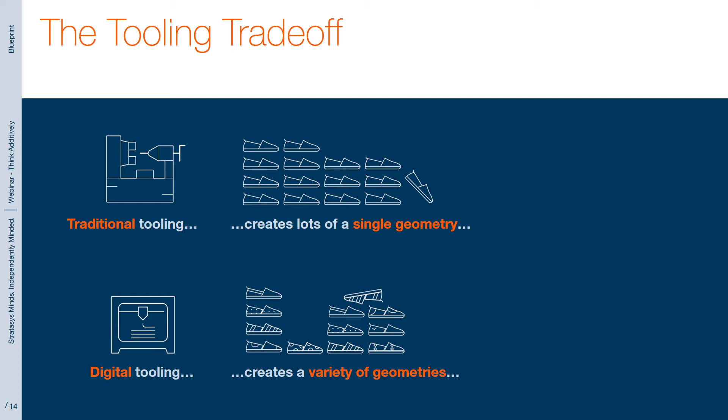Now, with traditional manufacturing naturally comes repeatability. With rigid tooling comes rigid processes and therefore rigid outcomes. Traditional tooling may require hand polishing, a little knob turning, or other adjustments to get what's needed, but once that process is down, it's pretty precise. Digital tooling is naturally more flexible, which generally reduces the accuracy and precision of the part.

For example, take injection molding. A moderate complexity injection mold takes months to design, manufacture, hand polish, and test, and then rework and hand polish again and test. But once it's running, it makes exactly the same part it was supposed to make. Every defect is rubbed away over the long weeks of hand polishing and fitting.

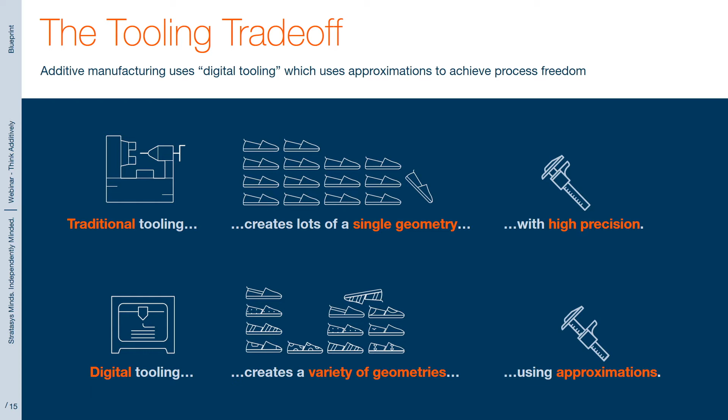Digital tooling is almost entirely created using automated softwares that turn CAD into parts. The user has to do very little to get digital tooling ready for action, but in exchange, they compromise by allowing the softwares to use geometric approximations to get a part very close to the complete design.

Okay, but enough theory. What actually are these digital approximations that are so critical to 3D printing and digital tooling? There are 3 that are shared by almost all 3D printing technologies, so we're going to explore them today and how to deal with them using good design practices. These inherent inaccuracies are mesh approximation, layer approximation, and toolpath approximation.

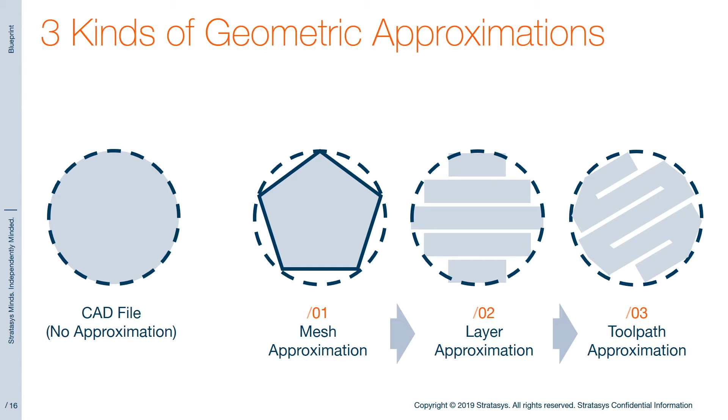So, for the first approximation, let's look at meshes. Now, I'm guessing most people are pretty familiar with mesh files. They've been around for a long time and are used in all kinds of digital processes, from renderings to video games. Basically, a mesh is a geometric approximation of a complex shape. It takes complex geometric entities like curves, splines, radii, lofts, etc., and generates triangles or squares that approximate those complex math-driven equations. It's kind of like trading quality for quantity.

A shape may only be made up of a couple of complex surfaces, or it can be made up of thousands of simple surfaces in the form of a mesh, like you see in the part on the screen. So why is a mesh used over CAD surfaces? Well, like I mentioned, they're very simple. Just a bunch of triangles all touching 3 other triangles in space. And because they're simple, they're non-proprietary or universal, and they are flexible. Basically, since they're just triangles, they can be edited by very simple programs, even in a text editor like Notepad.

Finally, it's easy to store color data in meshes. A mesh file is like a rock climbing wall with lots of footholds to attach color data, whereas CAD files are kind of smooth and slippery, making it difficult to assign color and textures.

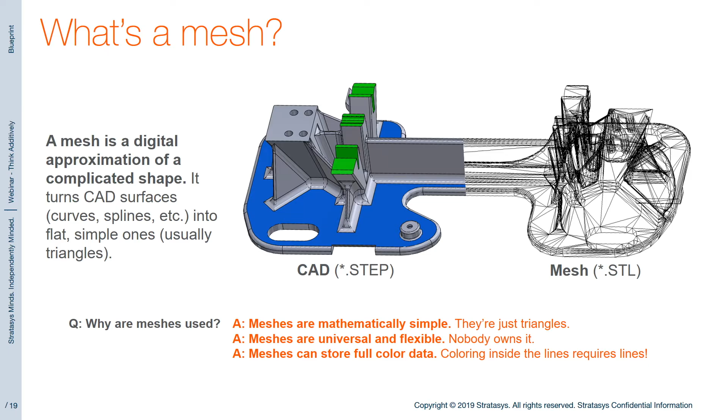Okay, so let's look at a mesh. This CAD model of a simple 3D printed duct is made up of a few complex curved surfaces, and I'll turn them into a triangular mesh. SOLIDWORKS files are often converted to mesh files before 3D printing, so it's easy to save as STL file in SOLIDWORKS. And you can see here that this is the mesh approximation of this CAD file.

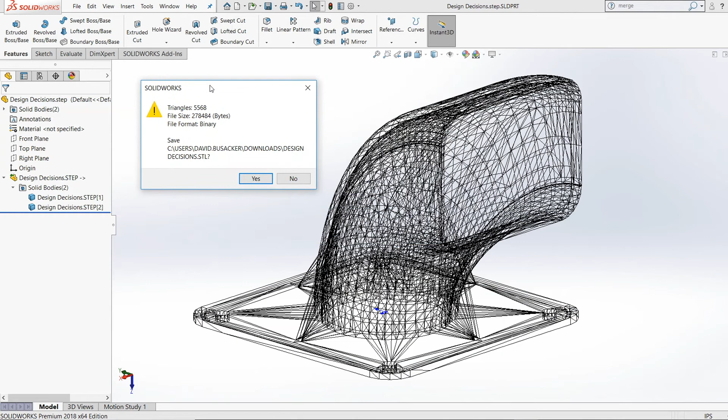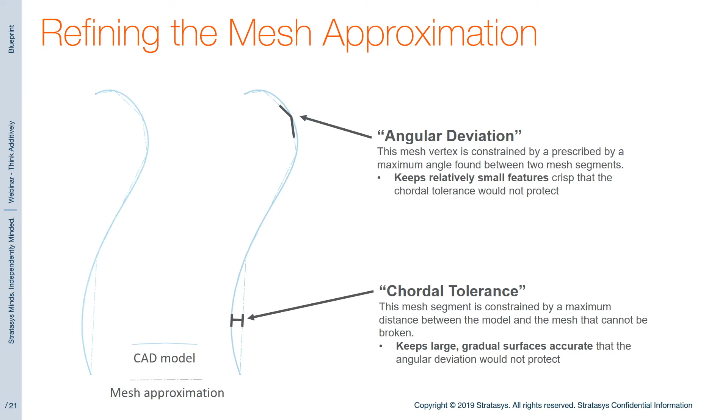Approximations can be a source of inaccuracy, but fortunately you have control over the degrees of the approximation. The math used to turn CAD files into meshes relies on 2 control factors: angular deviation and chordal tolerance. We are not going to go deep into the math on these ideas, but basically, reducing each of these variables is going to result in a tighter, more accurate mesh. But a more accurate mesh, like everything in life, comes with a trade-off.

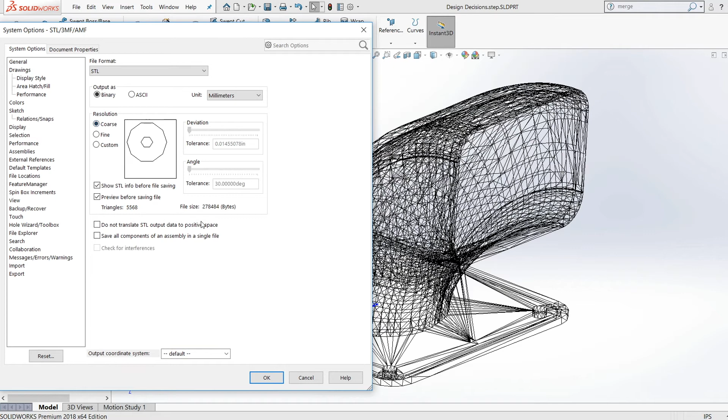To see that, we're going to go back to our duct model here, export to STL again. Now, if I click on Options, I have a little more control over how my mesh is created. There are a couple of mesh resolution presets here, coarse and fine. There are more triangles in the fine mesh, but it's a tighter approximation. You can also see, though, that the fine mesh is about twice the size in terms of data as the coarse mesh. And if I reduce both of these settings here, it gets to like 5 times the file size. So meshes get really big really quick.

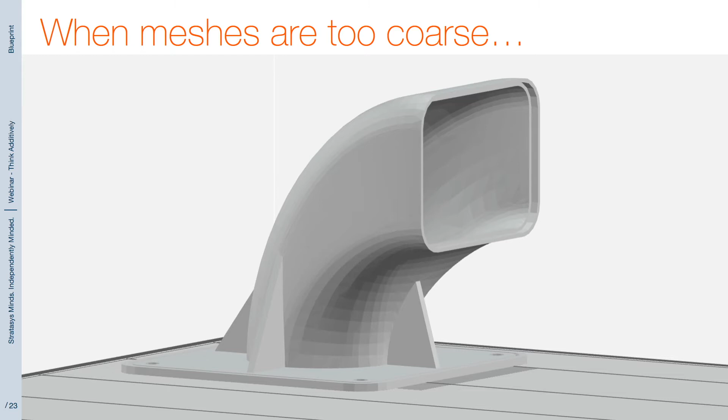Using a mesh that is too coarse is going to look like a geometric approximation. You better bet that the triangles in this coarse STL mesh here on the screen are going to show up in the final part. But on the other hand, large meshes can bog down your computer and add unnecessary processing time to design steps required before printing, like part cleanup, or orientation or support generation.

Okay, so here is a practical tactic to help with dealing with mesh approximations. Match the mesh size with your geometry and application. Sometimes it's completely fine to have mesh lines in a file, especially when doing time and material estimations on a work in progress part. But on the other hand, if you're printing a cosmetic part, especially if it has subtle curves, it's better to err on the side of a large, if unwieldy, mesh file.

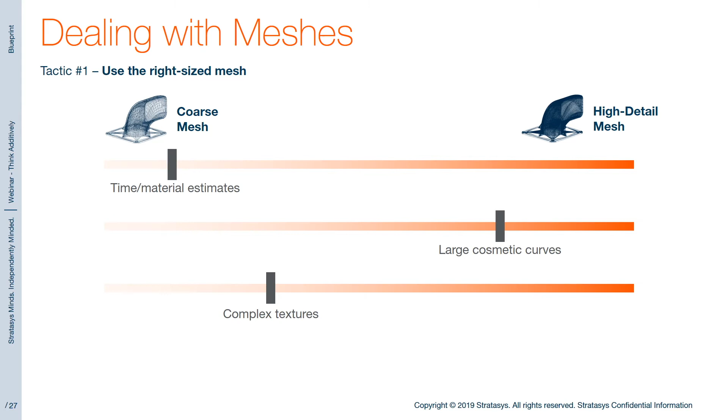If your part has complex textures or patterns, the file size is likely to get really large really fast, even on coarse mesh settings. It turns out, fortunately, that the smaller the feature, the coarser your mesh of that feature can be while still hiding the triangles. And when it comes to production parts that will be printed in the hundreds or thousands, it's almost always worth optimizing every element of the design, including the mesh.

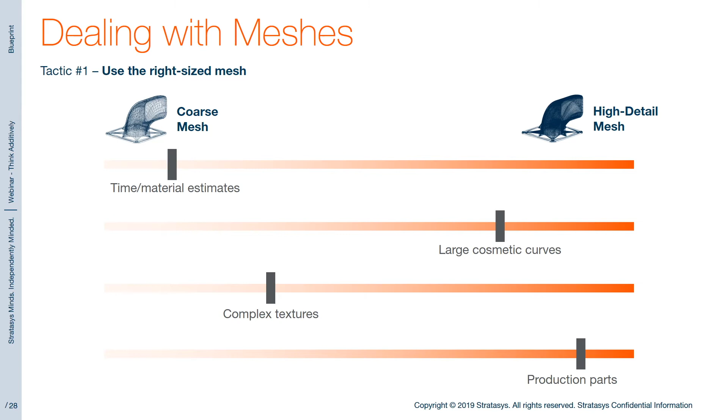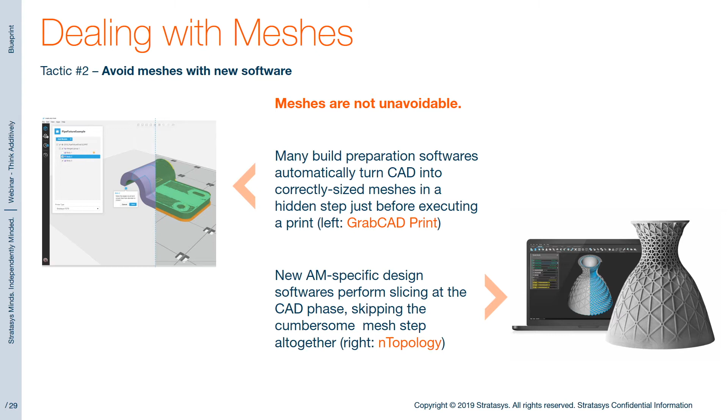Another good tactic is just to avoid meshes whenever possible. Many build preparation softwares allow you to import CAD straight into the software, and although they usually perform a meshing operation before printing, it's behind the scenes and allows you to bypass that user error. In addition, some design programs are integrating slicing right into the program, skipping the mesh step entirely. So keep an eye out as softwares get smarter so you're not wasting time dealing with these unwieldy meshes.

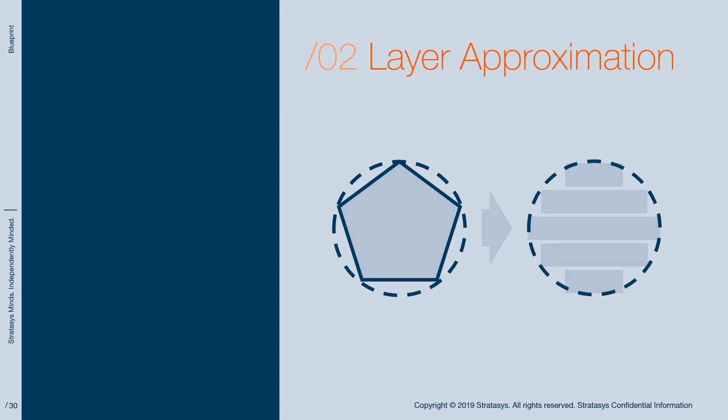Okay, on to the second approximation of additive manufacturing, layer approximation. Now, most people who are familiar with 3D printing know about layers. They are the foundation of every common 3D printing method today. In most technologies, they make an appearance in the final part. And unlike meshes that are being phased out and optimized, layers are basically here to stay. I'm going on the record that we won't see a layer-free additive manufacturing technology hit the market for many years.

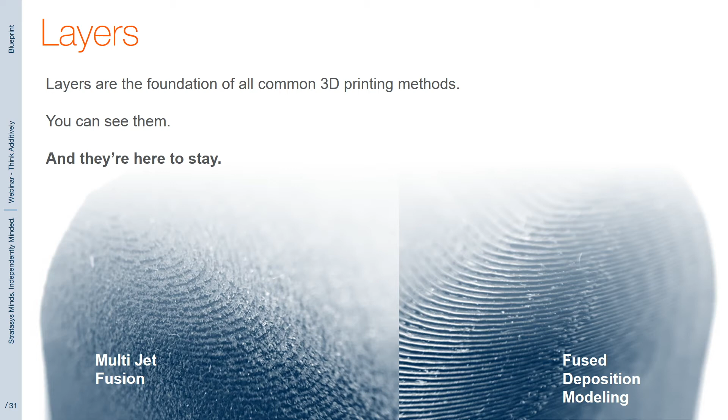There have been some advances in non-planar additive manufacturing and 5-axis 3D printing. Those are both mostly FDM platforms. But the two reasons that these aren't mainstream is that multi-dimensional layers introduce a lot more variability into the manufacturing process, and it's honestly just really tough to program. Okay, so my point is, layers are here to stay. I'm going to show you visually the effect that layers have on your 3D printed part and why they're an approximation of your original design, and basically how you can't avoid them.

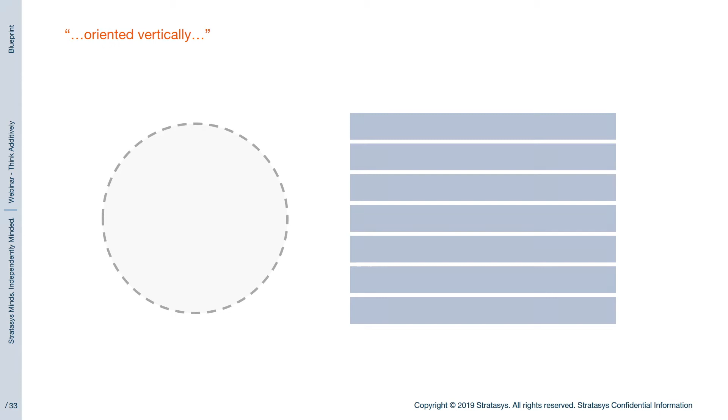Let's start with a circle. And let's decide to 3D print this circle standing up. We're going to use the layers on the right to create this circle. So our slicing software matches up the circles to the layers, and wherever the edge of the layer touches the circle, the software makes a cut. Of course, we're doing this in 2D, but you can imagine how this works in 3D. So after the unused layer is removed, the layered part looks like this. Not bad. Actually, it looks a lot like a circle, so we're set.

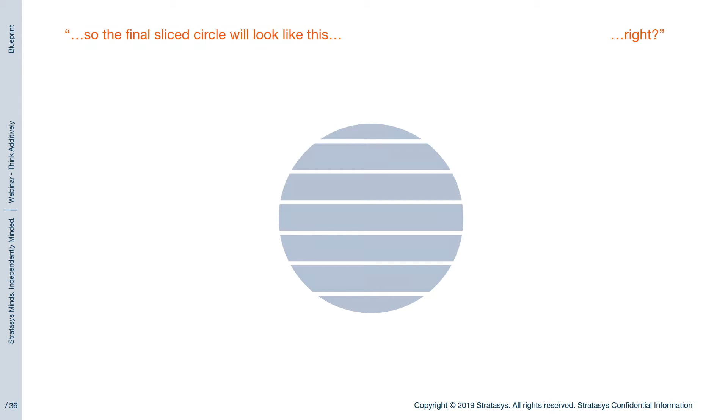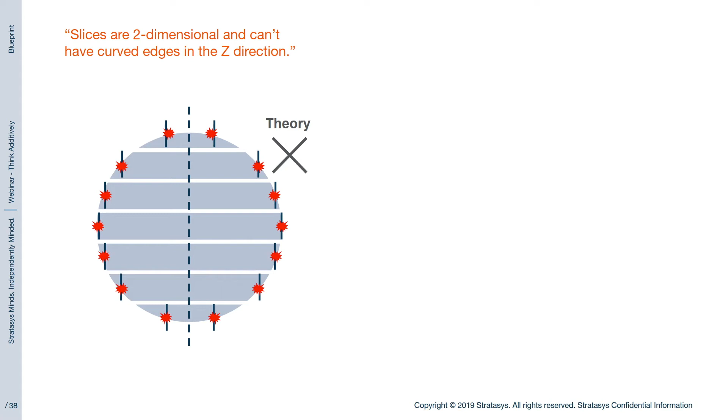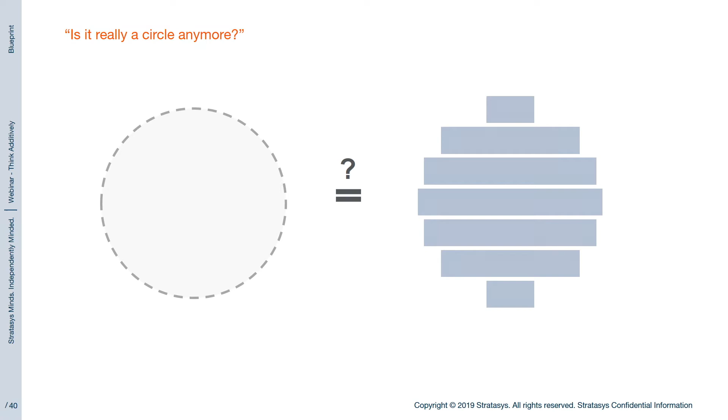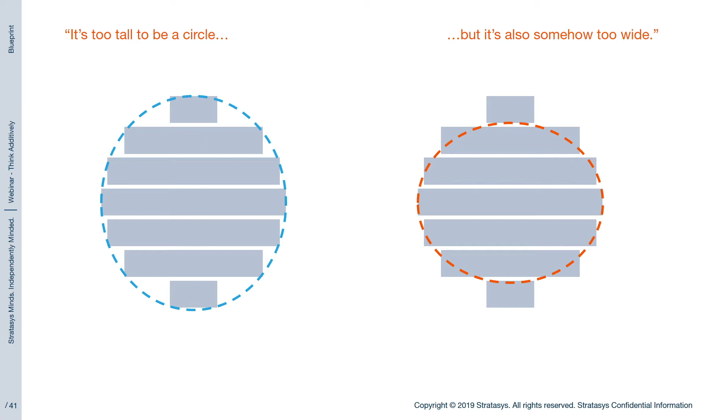Right? Wrong. That's not actually how layers look. See, the layers are cut in a vertical line and can't curve with the circle. In reality, this is what our layered circle will actually look like. That doesn't look quite as much like a circle. In fact, is it really a circle anymore? All at once, our approximation looks taller than it is wide, and also wider than it is tall, depending on how you look at it. But at the end of the day, it isn't a circle at all. It's not even curved. It's an approximation.

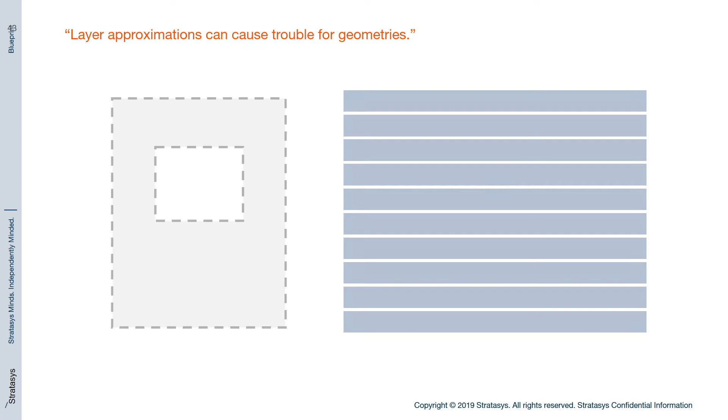Now, layers are definitely a problem for curved shapes like circles, but they can even cause issues for square, straight shapes too, especially when it comes to accuracy. Take this rectangular shape with a cutout, for example. Should the layering process align with the top of the model? Or should the layers start with the bottom of the model? Because depending on how this part gets sliced, the slicer program will assign slices in different ways.

In this case, slicing the part from the top on the left-hand side leaves an incomplete or missing bottom layer, and slicing from the bottom, the right-hand side, will cause dimensional problems on the vertical cutout. If you don't believe me, rewind the presentation to the previous 2 slides and check it out.

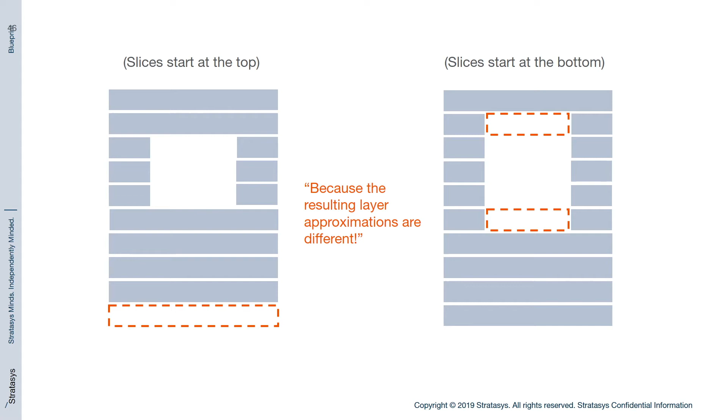There are really 2 practical tactics for dealing with layer height approximations. The first is to adjust the layer height. This is only feasible with some technologies, namely FDM, polyjet, and stereolithography. But if you're printing in these technologies, you can reduce the layer height to achieve better layer approximations at the expense of a slower build.

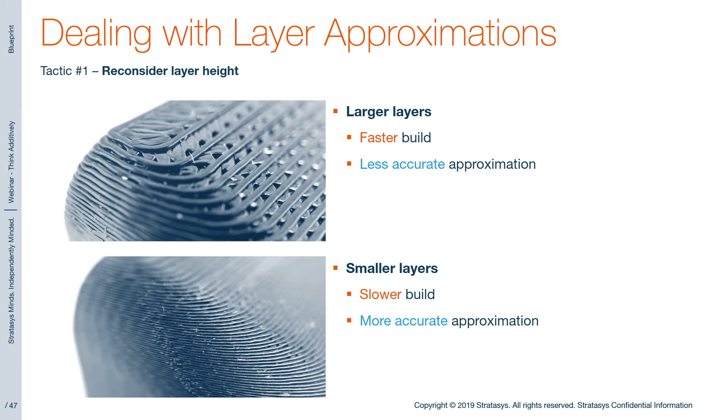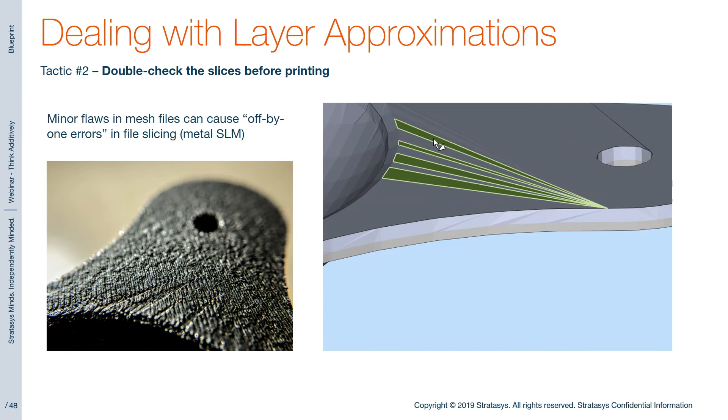The second tactic applies to all 3D printing technologies, and that's just to check the layers before hitting print. In the case of this metal powder bed fusion build, some very slight variation in the top surface of the mesh file led to faulty layer generation. This could have been prevented by checking the file before printing.

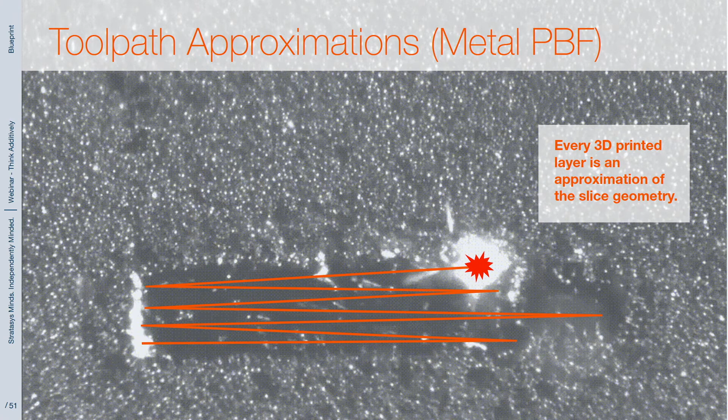The path taken by the laser to create this shape is called the tool path, and it's another one of the inherent approximations to 3D printing. So a toolpath is the pattern used within a layer to actually add to the growing part. Additive manufacturing technologies use one of the 2 kinds of toolpath methods. The first is called vector toolpaths.

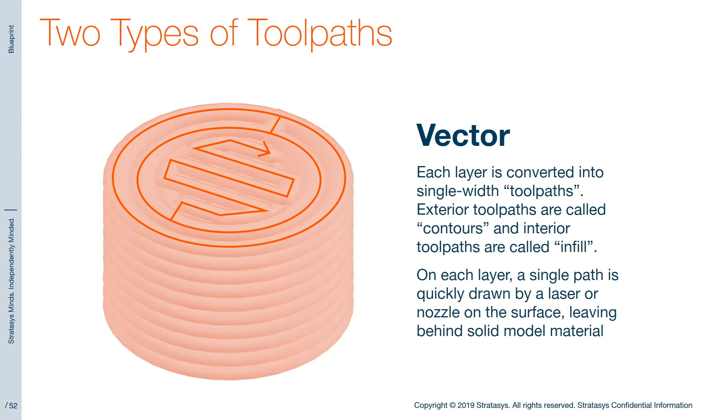Vector toolpaths add to a growing part when a nozzle or laser passes over the shape of the layer in a pattern. When a child has to carefully color a shape in a coloring book, they often will draw around the outside, then scribble in the middle. Toolpaths work the exact same way, involving outside contours and inside infill.

The other kind of toolpath that a 3D printing technology may employ is called voxel toolpaths. Each layer in a voxel technology is converted into a pixelated image, deposited onto the layer, typically using jetted ink, and then joined to the rest of the part either using heat or a binding material. Since these pixels are really cubes that are the height of 1 layer each, they're actually called volumetric pixels, or voxels for short.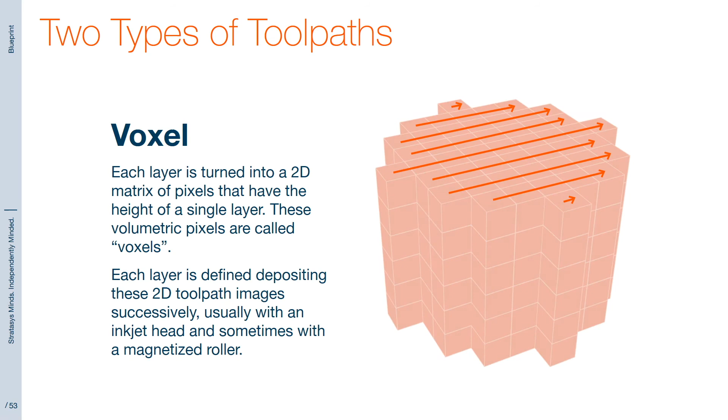So you'd think that one of these 2 toolpath methods was probably the common one and the other one is niche or emerging, but that's not really the case. The common 3D printing methods today use both methods. For example, in metals, all metal powder bed fusion technologies, SLM, DMLS, powder bed fusion more widely, use lasers in a vector pattern, while metal binder jetting uses an inkjet voxel technology.

For the vat photopolymerization family of technologies, stereolithography uses a laser, but its close cousin DLP is a voxel technology. In polymer powder bed fusion, SLS, selective laser sintering, uses a laser to melt each successive layer of plastic to the layer below, while HP's multi-jet fusion and other high-speed sintering technologies use a thermally conductive ink and a heat lamp to create each layer.

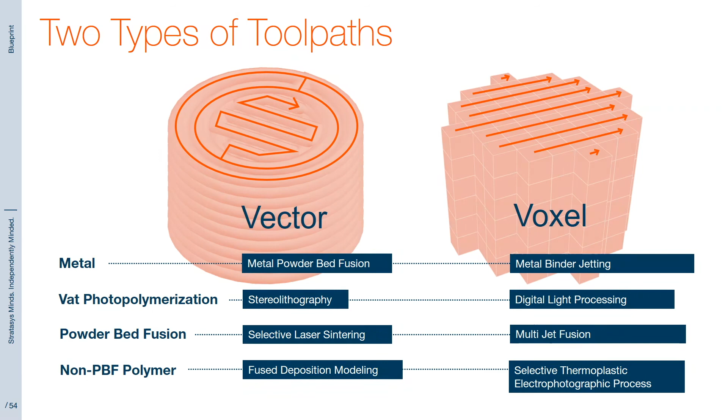And when it comes to non-powder bed fusion polymer technologies, the most common being FDM technology uses a vector toolpath. There's actually a voxel equivalent called STEP technology being developed by Evolve Additive. Okay, so why do we care about these types of toolpaths? Well, each comes with their own way of geometrically approximating the layer they're defining, and therefore they each have their own drawbacks. Let's look at vector toolpaths first.

On the left-hand side, the toolpaths of a very small FDM feature is shown, and you can see that there are issues filling the beads of polymer into the right shape. Even though there's nothing very complex about this little feature, after creating a contour around the part, there's not enough space to fill it in with any infill. And even if multiple contours are used, like on the right, it doesn't fill in the center. This kind of incompleteness in layer definition, especially when stacked over and over on many layers, is going to lead to a pretty weak part that will probably break.

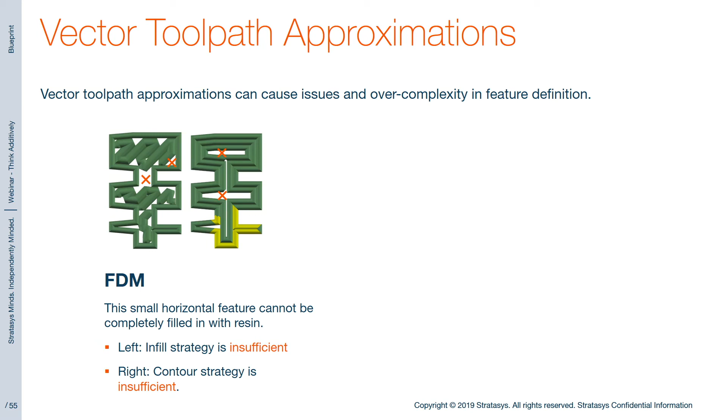Metal powder bed fusion experiences a different issue with toolpaths: uneven heating. So with polymer PBF, the inside build temperature is held just under the melt point so that the moving laser pushes the melt temp just hot enough to melt. Metal powder bed fusion machines also keep the powder pretty hot, but steel requires a lot more energy to melt than nylon. So as each layer is built, the energy being concentrated on one little point is enormous, leading to internal stresses in the part.

Build softwares generate the toolpaths in a distributed way to try to mitigate this, called hatching, but it's not always enough to overcome the internal stresses. And like you see in this slide here, especially when many thick horizontal sections are built, build warp and even breakage and failure can occur.

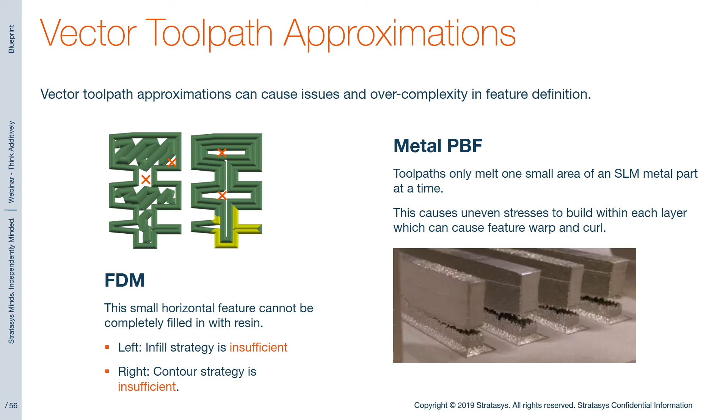So voxel-based toolpaths also introduce complications into builds. Generally, these issues are less structural and more visible. One of the most common voxel-based technologies is polyjet, also known as material jetting. The picture you're looking at here looks a lot like the stair-stepping you get from layer approximations, but in fact those rings actually make up the sidewall of that part.

That's because as the inkjet head moves back and forth in the polyjet process, it only has a finite number of nozzles from which to eject the photopolymer. The result is that any sloped or curved surfaces that are almost parallel with the head travel direction, usually the x-axis, will show some stair-stepping effects that kind of look like layer lines. The only way around this is really to tilt the part so that it doesn't line up with head travel. Obviously, that's kind of hard to do with a sphere.

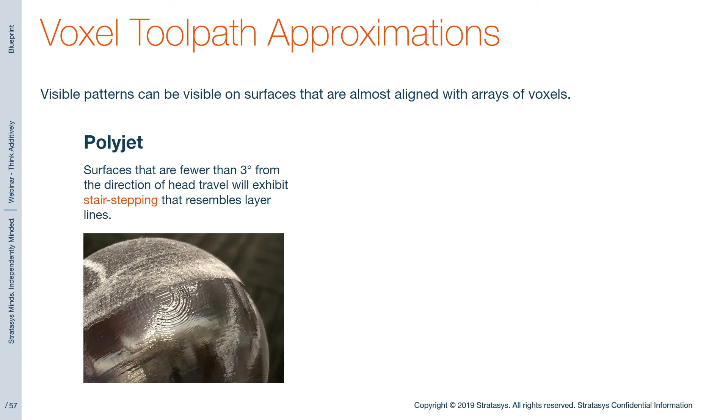DLP technology, especially Carbon's digital light synthesis machines, exhibit really amazing build definition. It's known for exceptional build surface quality, and it's one of the most precise 3D printing technologies, though overall accuracy can sometimes be an issue due to material warping. Ironically though, because it builds so beautifully, it's also the easiest to see the voxels.

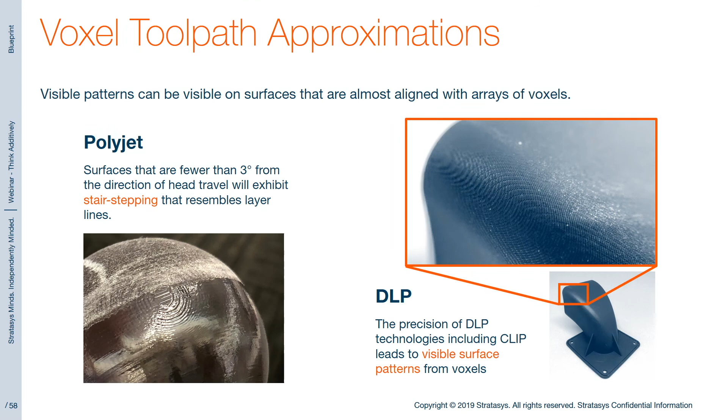So in this close-up of a DLP part, you can see the interplay between layer lines and the pixelated layers. Unlike on polyjet, where layer lines end up kind of muffled and invisible, all three axes are visible in DLP, which create interference patterns that can be a little distracting, but as you can see zoomed back out, the overall part actually looks pretty nice.

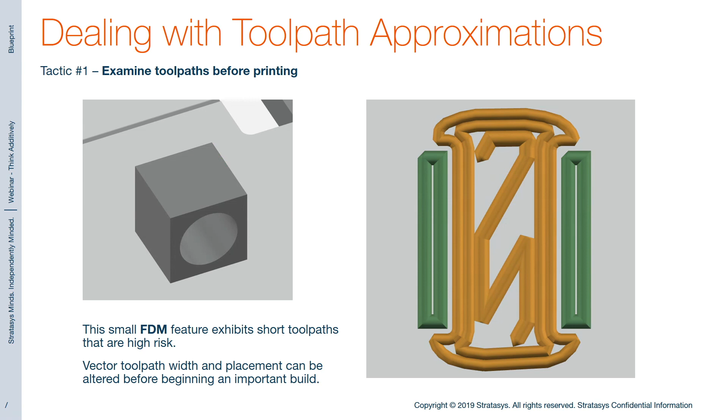So as we've discussed, toolpaths cause different problems, cosmetic and structural, to varying degrees across 3D printing technologies. But the one thing that they do have in common is that they are ultimately unavoidable. So how do you deal with them? Well, the first tactic I'll provide is simply to review toolpaths before building a part. In the case of FDM and other vector toolpaths, small features can become unstable if toolpaths are too wide or too short. Almost all build preparation softwares allow you to adjust laser or extrusion width, speed, and starting and finishing points. Similarly, the second tactic is to review toolpaths in case of failure.

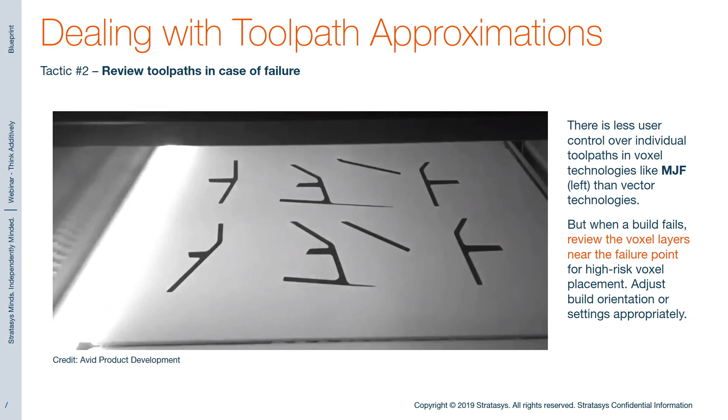This time lapse of MJF parts being built shows just how many layers and how many voxels go into building a full tray of parts. Isolating a failed feature in a failed build and examining the toolpaths used to create it may just be what you need to make a different choice about orientation or, more likely, part design. Like I've said so many times now, geometric approximations are completely unavoidable with 3D printing. It comes with the territory of digital tooling.

So we've talked about a lot of things today, but I want to provide you the number one thing: communicate. Having watched this webinar, you are probably among the 1% of people who understand the most crucial elements to design for additive manufacturing: approximations. Communicate these ideas to your colleagues. The number one reason that additive manufacturing remains at the peripheries of most companies is that it is not understood, from a business perspective and from a technical perspective.

At Blueprint, our mission is to spread this knowledge, but it's much easier if you do it from within your organizations. Proactively designing for mesh resolution or layer heights or voxel approximations just might be the key to making an additive application successful for your team.